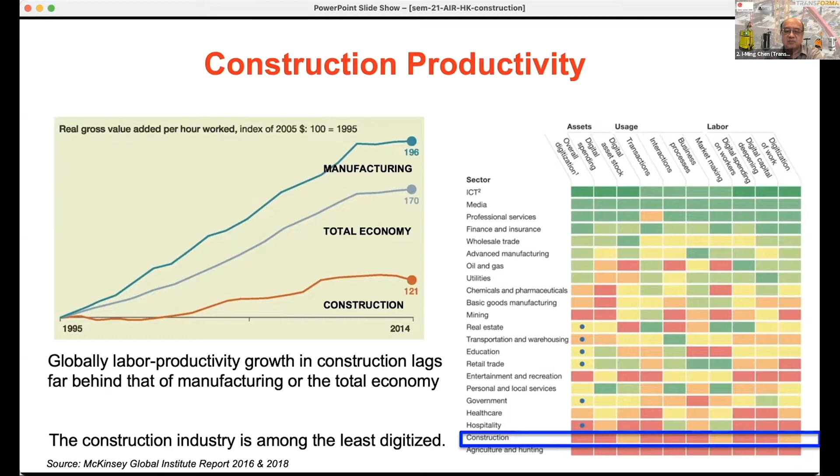The construction productivity, I think, as Oliver just mentioned, is low compared to the total economy globally, and of course much lower than manufacturing. In terms of digitization, this is also low compared to many sectors, and digitization is also one of the indices for productivity.

But we know that construction is a very complex ecosystem. Manufacturing is also complex, but in the construction industry it actually involves, from the very beginning, the architecture, developer, contractors, and even after the building is completed, you have the facility management as well. So now, because of the advancement of robotics, IT, information technology, and AI, we are trying to move up the construction sectors with digitization efforts.

So now, how do we really do that? Because we see, on one hand, there is quite a bit of work done in the sector, but a lot of construction work is related to regulation. So how do we do that? This will show you how we tackle this problem.

So in terms of Singapore, the government actually promotes the use of these systems. On one hand, the government would like to use this so-called TRL, technology readiness level, to look at the system's maturity. They want to use this way to mature some of the lower, newer technologies through public demand, becoming the first technology adopter. So agencies will provide funding to companies responding to their needs, such as our Building and Construction Authority, the National Environment Agency, and so forth.

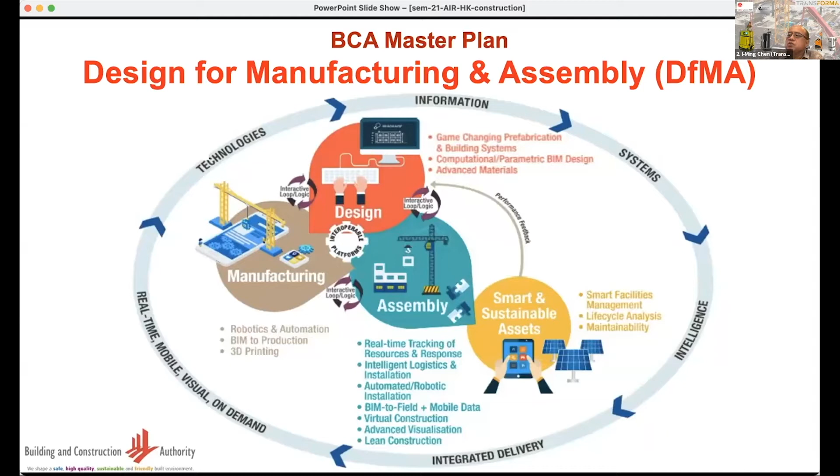So this shows you an idea of what we're talking about. In Singapore, because land is scarce, we show you how Singapore's precast or module factory looks like.

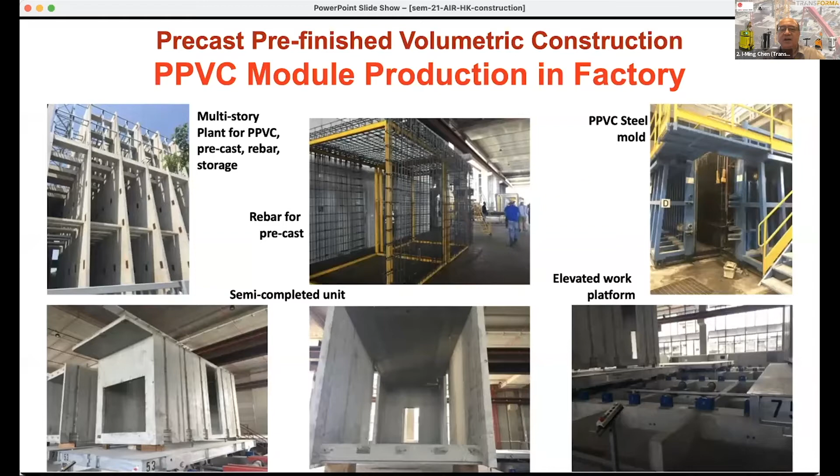So we have the factory, they're all multi-stories, and they put automation and some equipment in there, for many facilities like precast rebar storage at different floors. Unlike those countries that have infinite land, where you can put things in a horizontal plane, here things work differently.

So after all this is done in the factory, those modules will be shipped to the construction site to be installed along with other precast parts. We call this PPVC - precast pre-finished volumetric construction. In short, that's the modules.

So these modules weigh about 30-40 tons. After they're transported from the factory to the site, they will be stacked on top of each other, just like a Lego block. The crane needs to be a high capacity crane for hoisting all this to the designated location.

So after blocks are joined together, there are many common areas to be joined through precast components, and there's also some in-situ fabrication. But through those kinds of modular construction, we can greatly save manpower.

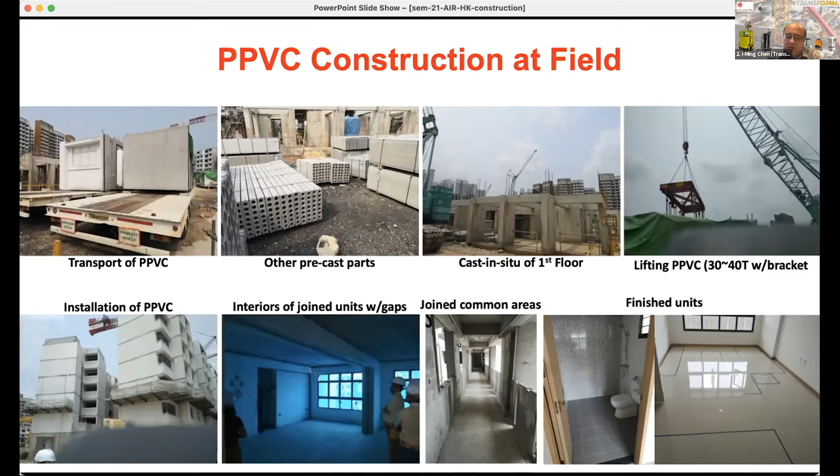And of course, at the end, we still need people going there to do inspection and final finishing. So with this PPVC, I think Singapore can already save about at least 30% to 40% manpower at the installation stage.

But of course, we're not stopping there, because we still have a lot of people doing different bits of work here and there. Therefore, our National Robotic Program Office launched a 3-year program we call Robotics for Construction 4.0 from 2019. I happened to be the program lead.

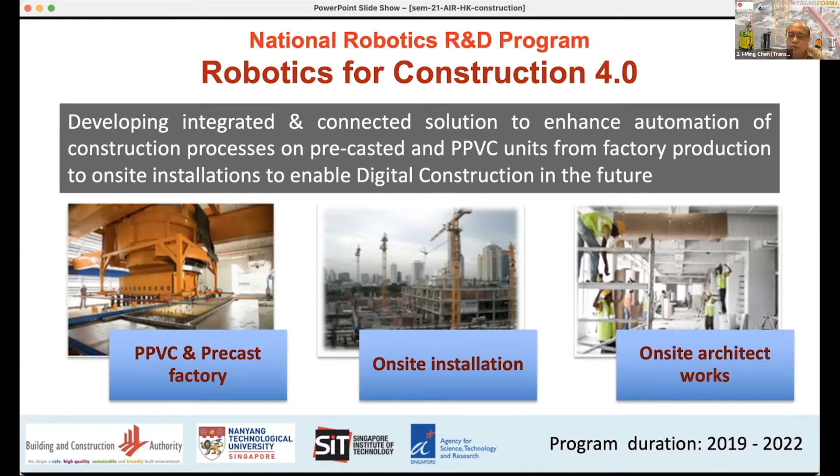The goal is to develop a number of linking technologies for an integrated solution to enhance automation of this process for those precast and PPVC units from factory to sites. The vision is grand, but we can only start small, because there are too many things we have to do - we cannot cope with everything at one time.

So this program, we adopt a whole ecosystem view. This shows you what we have in this program. Under this program, we have 4 major packages. One is the so-called smart cyber physical systems.

That's actually to develop the AI engine for manufacturing of those PPVC units. Even in this plant they have the so-called MES system, but on top of that, this kind of construction factory is very difficult to schedule because of a lot of uncertainties. We also have a robot just using the vision system to do imaging for supervision.

And we have one other robot for on-site work that will be able to bring heavy loads on-site and also overcome obstacles and stairs. Finally, we're working on one project related to cranes, so as to make it smarter and the installation quicker. This is very important because most construction sites now in Singapore use cranes.

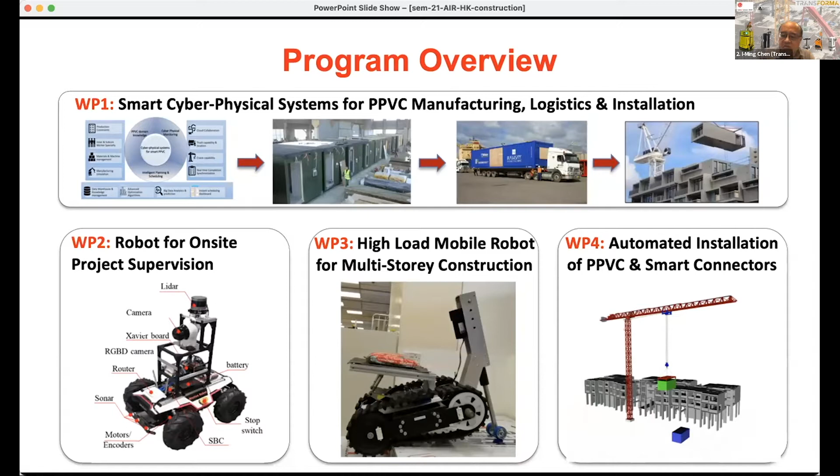So now let's start from the first thing. The important thing of this cyber physical system is the integration of PPVC production, domain knowledge, intelligent planning and scheduling, monitoring, to achieve a fully connected solution from the factory equipment to on-site equipment, with real-time data and real-time decision optimization, as well as manpower development.

So this whole system will be able to integrate input coming from some of this... human. So the system we can allow - it's a cloud-based system - we will be able to allow the workers to input their schedule and also link it with the machine information.

We also need to realize that in the factory, it will be efficient to manufacture all identical modules in batch production. But on-site installation is different because that's vertical installation - we need to build floor by floor, installing different types of modules level by level. So how do we balance the requirements of these two types of work?

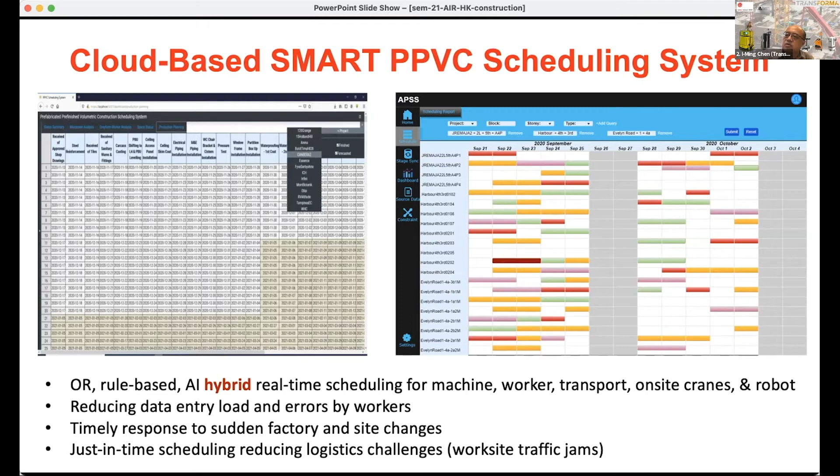Factory produces the same modules, but on-site work requires installing different modules. So how to balance this becomes a very important thing, which has never been thought of before. We know this kind of modular manufacturing will become more and more important, not only in Singapore but also in other places, like Hong Kong, which has large construction projects that need to be done.

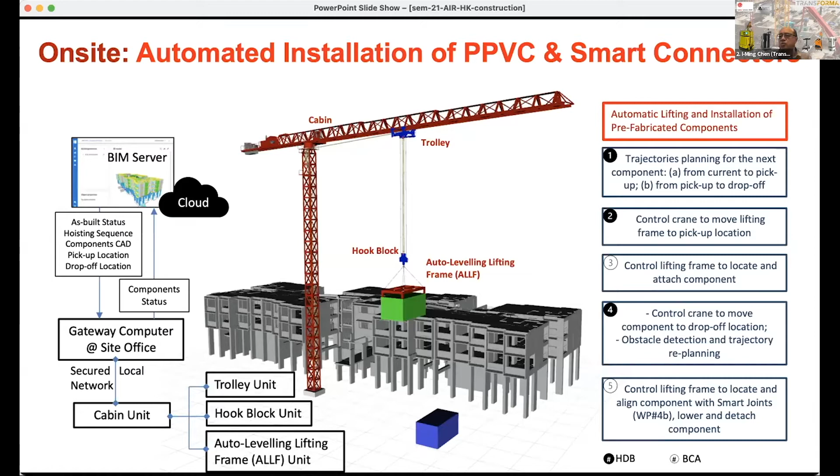Now let's look at the cranes. One of the bottlenecks in on-site assembly of modules is crane lifting and installation efficiency. So we're developing an intelligent control system for the tower crane to act like a robot arm that can automatically move around with trajectory control and BIM information update, using various sensor control modules. They're designed to be fitted into existing cranes.

This project has almost been completed, so we've done quite a few trials. This shows some of the trials we conducted in the training ground of the BCA for evaluation and fine-tuning, from cabin control to trolley control to hook block and wireless control. All these aspects of work require a lot of new ideas and engineering effort.

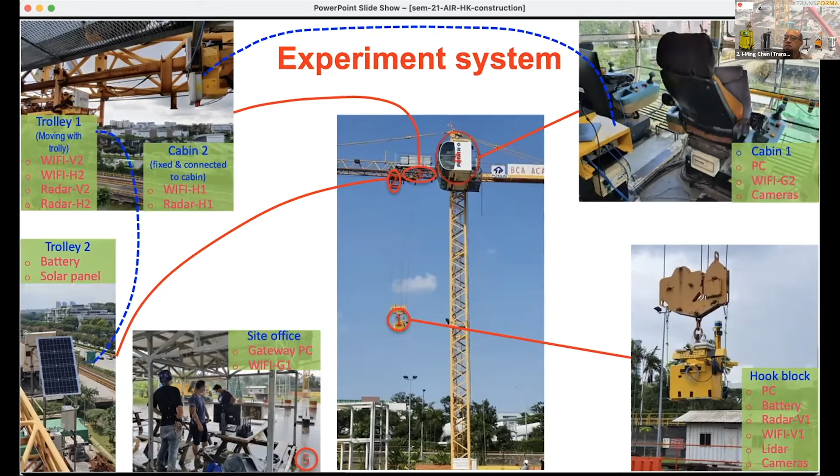Now, the PPVC unit is just like a Lego block, so it has connectors at the four corners linking the modules together. In this project, we also look at the design of the connectors and condition monitoring of the connectors in use. For effective connection in the installation process, we have three types of connectors: wire loop, corrugated pipe, and J-hook, as shown here.

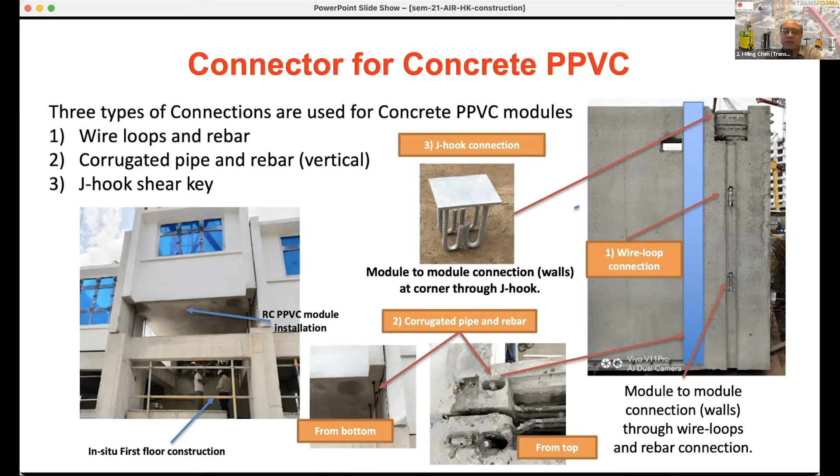Because different modules may have slightly different designs depending on the company, we're trying to look at how we standardize that, as well as how we bring that to what we call monitoring the health of the connection all the time.

Now, we mentioned we have a project on robot supervision of project progress. Currently this is done by a supervisor walking along the sites. The main technology here would be 3D vision for object detection and recognition, put onto a mobile robot. We also have BIM information fusion for filtering the navigation.

The wheel robot is the most useful platform we use for the operation. Having said that, we can of course put this onto drones or legged platforms, but that depends on accuracy. We estimate this covers about 80% of the jobs, and we're also looking at what other possibilities exist.

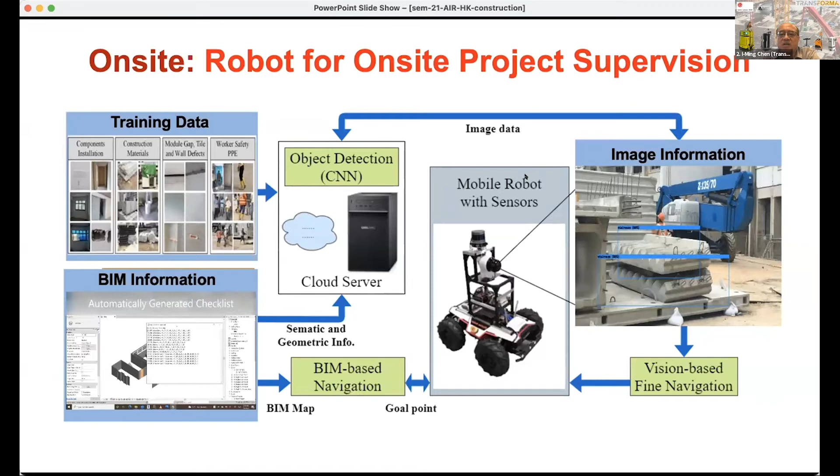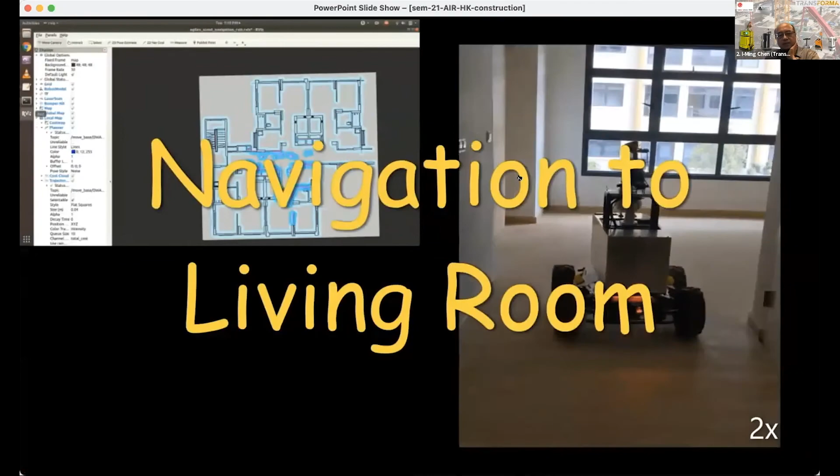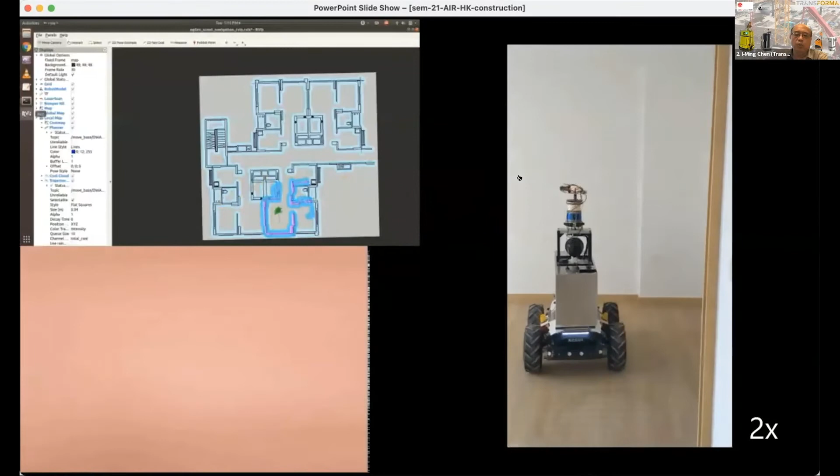Let me show you a video of these trials. What we can do here is bring in BIM information, and then use the BIM maps as a guide to do the navigation, because robots have what's called SLAM, simultaneous localization and mapping. With the BIM information, we can greatly save the effort of doing the navigation, and also do some planning before we start.

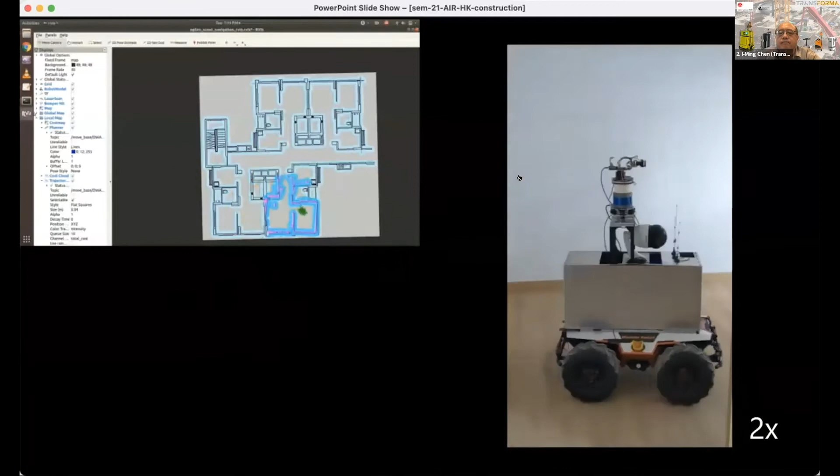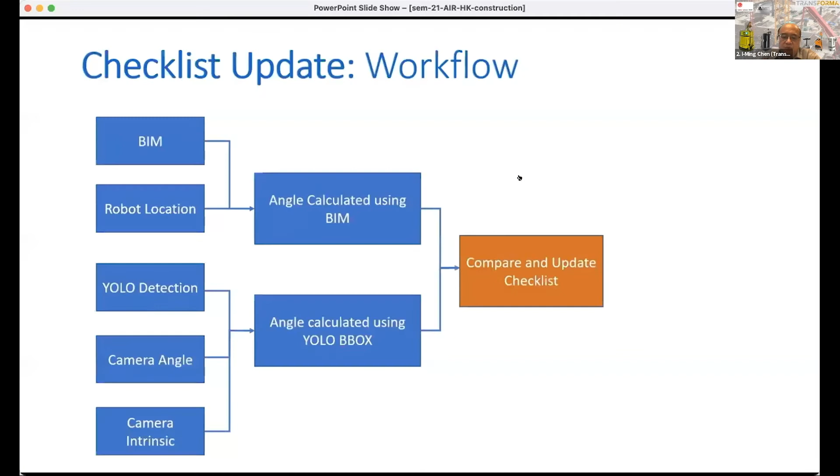This shows how we look at this as a near-completed unit, but we could also do this before the staging. Finally, after they check, they will update this. So this could become a fully automated process.

We also mentioned we have another on-site robot for bringing heavy loads across multiple types of terrain, including staircase climbing. Why do we do staircase climbing? Because right now the work site has a very limited workforce, so contractors would like to deploy human workers for more skillful work, such as surface preparation and installation, rather than just finishing work. So these tasks can be replaced by robotic means.

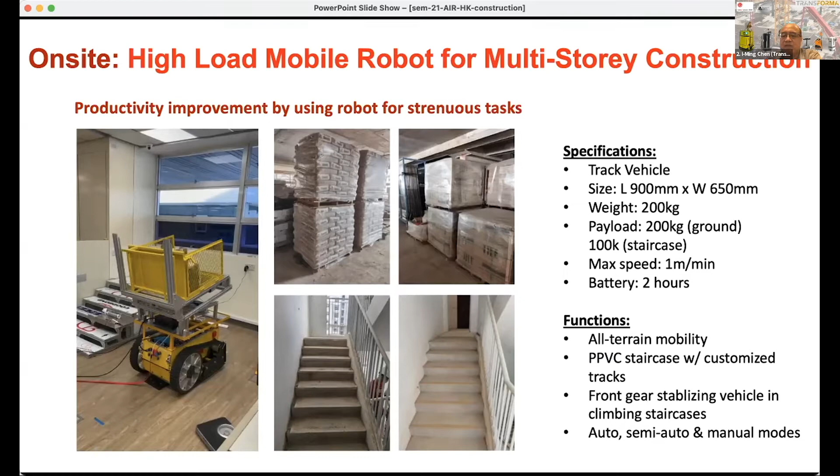Therefore, because we need to cope with different types of terrain, we're looking more into a track vehicle design. This is how we perform the field trial. You can see how these machines work, designed with a multiple payload design.

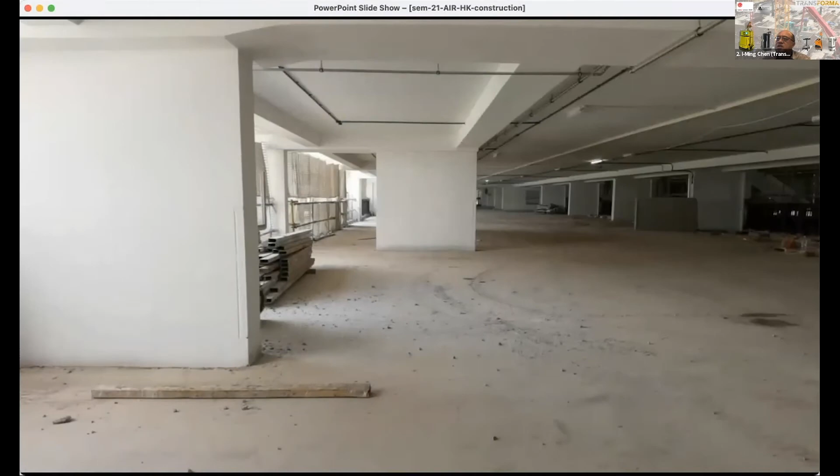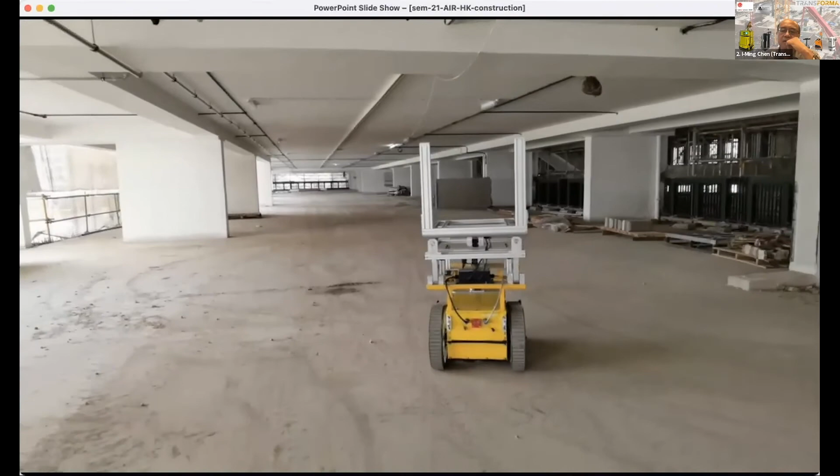So you can carry goods. This version can carry about 200 kg of load in one go. We have different versions; the bigger one can carry up to about half a ton. On top, we can design it with just a bin or with a small forklift that can automatically load and unload different materials.

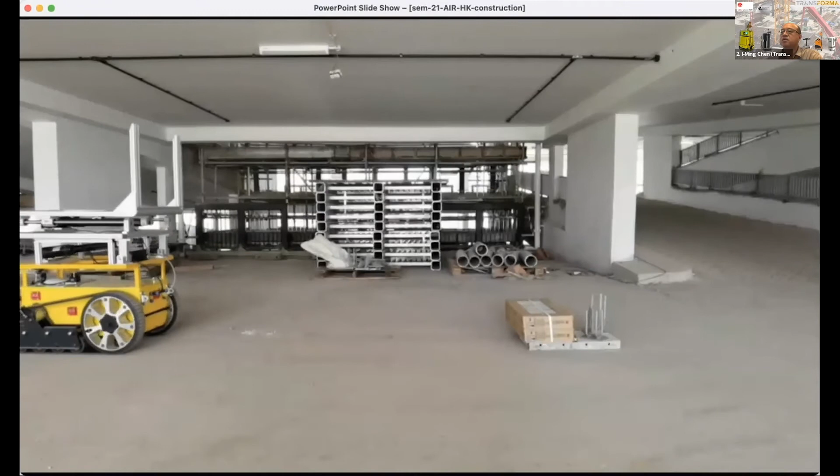And we're also considering putting the manipulator arm on top of that to do some drilling work and so forth. So this is versatile, but of course in actual use we may not do all of that. That really depends on your site, the type of site and condition, and the robot will be done autonomously or semi-autonomously, or simply just using the joystick to control.

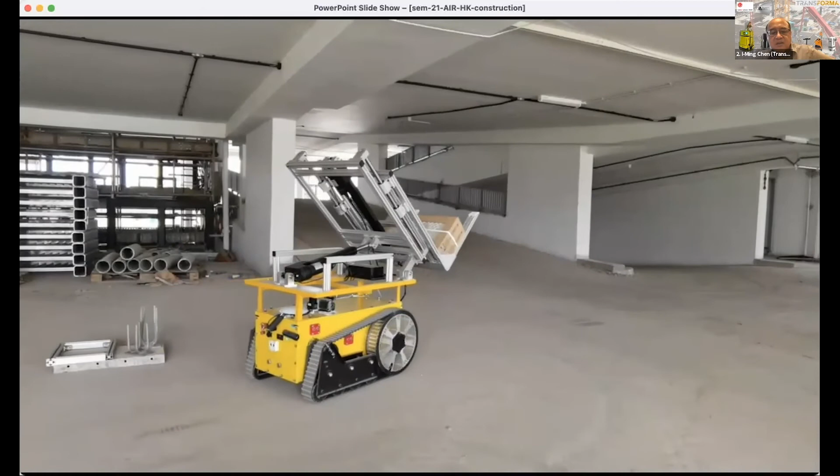So human operation is one thing, but after we discussed a lot of feedback, I think they like it more in the follow-me mode. Considering the complexity of the sites, if you do autonomous navigation, we may still need to give them some pre-designated route to go. But if you have a human worker just go in first, then this robot can follow - that also can work. So this is really how we look at the navigation capability, and the mode becomes quite important.

So this shows you how it works. So this we can bring back.

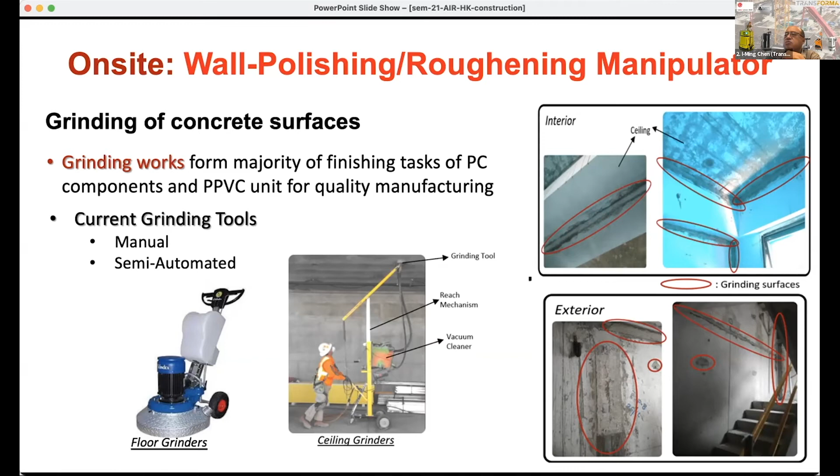In addition to the 2 robots, we do supervision or lifting heavy goods. We also identified the manipulator to perform concrete surface polishing and roughening, which is important for PPVC, because after installation some part of the PPVC surface still needs to be polished, and the gap needs to be filled with grouting. But now all this is done manually by workers, and it's strenuous and unhealthy for them. So this work has now been tested at SIT, Singapore Institute of Technology, and there are several contractors now doing field tests.

So this system now adopts a cable-driven system with frame support. The normal force required by grinding or roughening can be achieved through this configuration with a carefully designed layout, but the normal force is not as large as those for metal grinding. We adopted this kind of design because it allows us to do fast installation with covered surface area of arbitrary size.

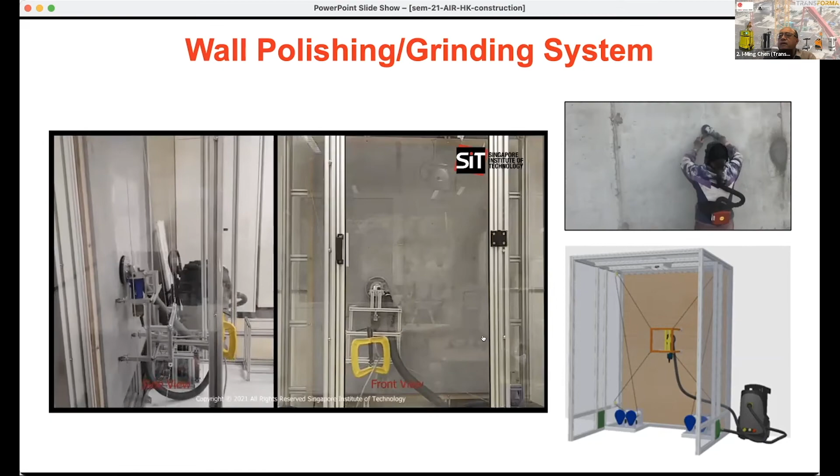So this is some preliminary result of this grinding, which is much smoother than the manual work. The researcher had some prior experience dealing with aircraft grinding, so changing this to a cement surface was also quite straightforward.

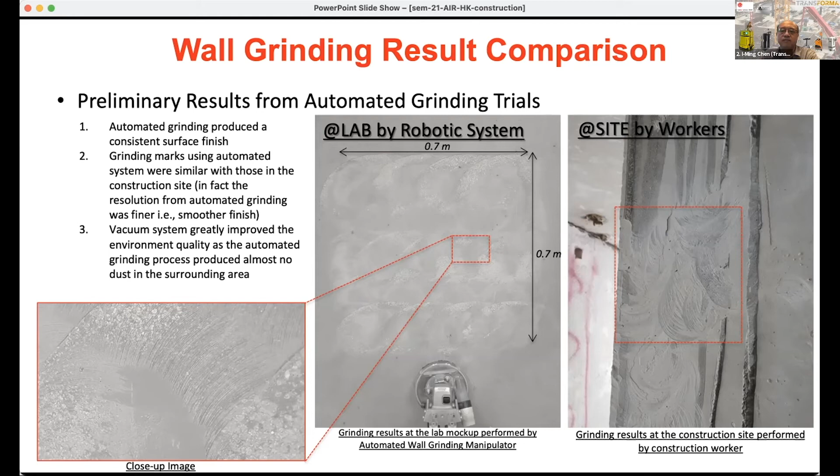Now as I mentioned, this is a government-led project, and we have universities and research institutes performing the R&D work, and we are testing along with several industry partners, from contractors to end users, and even some equipment owners. But for others, there are some government-led demand projects at a more mature stage, where the government will help us move in to test and speed up the commercializing effort, because construction sites in Singapore are normally limited in quantity.

So these are some work done by our Transforma Robotics, which is one of the construction or built environment robotic companies in Singapore. Transforma Robotics was spun off from NTU since 2017.

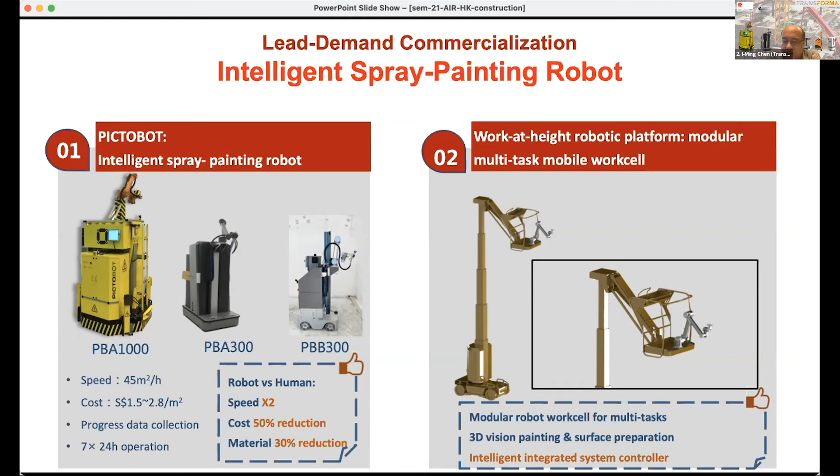So under those projects we worked on with JTC and some BCA, over the past few years we've been working on robotic painting and coating for buildings and other infrastructure as well. We reckon construction scenarios are not standard, hence we developed a number of platforms to adapt to different construction environments, from residential, commercial to industrial estates. We also use the same automatic control to extend the robot functionality beyond spray painting to other tasks. So here we show you one of our commercial painting robots that can paint up to 3-meter range.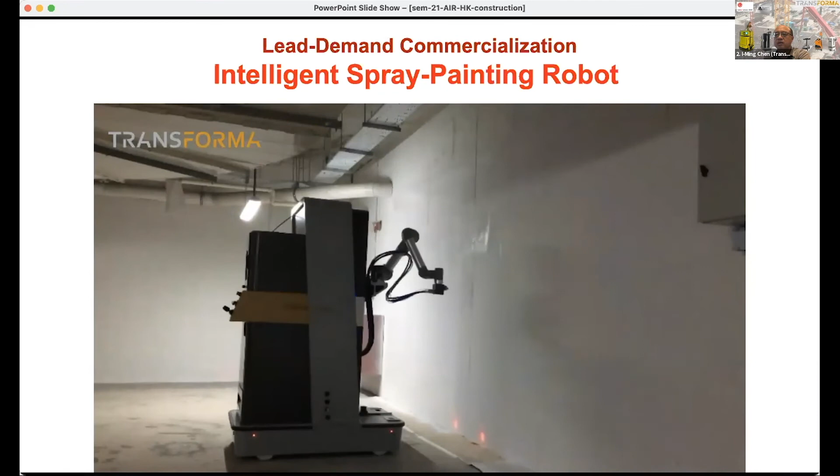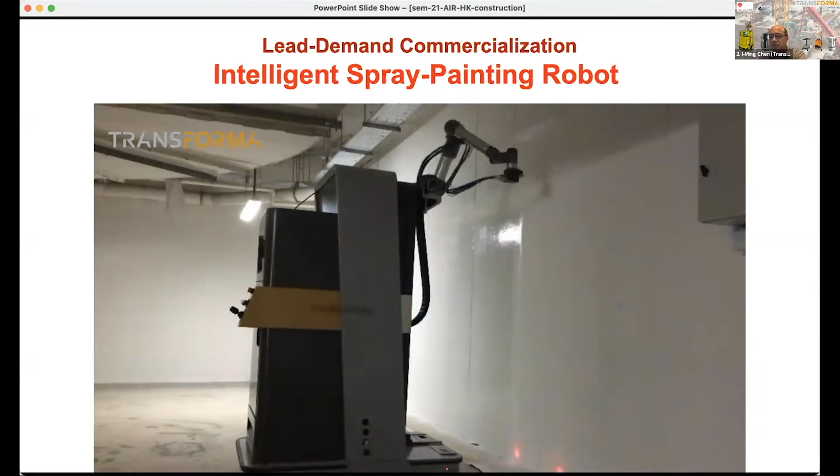This is for car park painting, for new or renovation work without much human intervention. So in this way we can save manpower. Of course we cannot say we can completely remove the manpower, but humans just need to go in at the beginning to do some preparation work, masking out areas, and then after that the robot takes over, and the human needs to do some wrap-up work. So I should say humans still need to do probably about 10 to 20% of the work, and the majority of the process will be done by the robot automatically.

So the robot also scans, because we use the scan, so the robot will be able to recognize if you have a window or door, to avoid that.

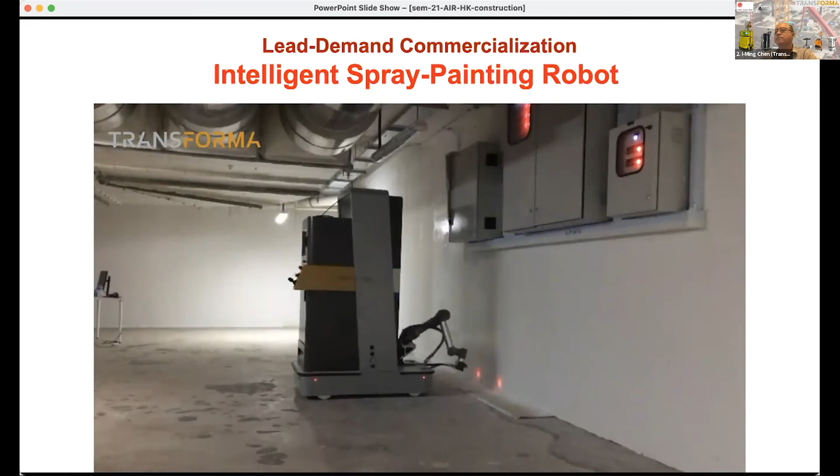Of course, the application scenario includes on-site and off-site work, so we have done these in different locations. Protective coating is another area we're working on, because these areas require very precise coating and are very hazardous and unhealthy environments—the kind most people want to replace with equipment or robots.

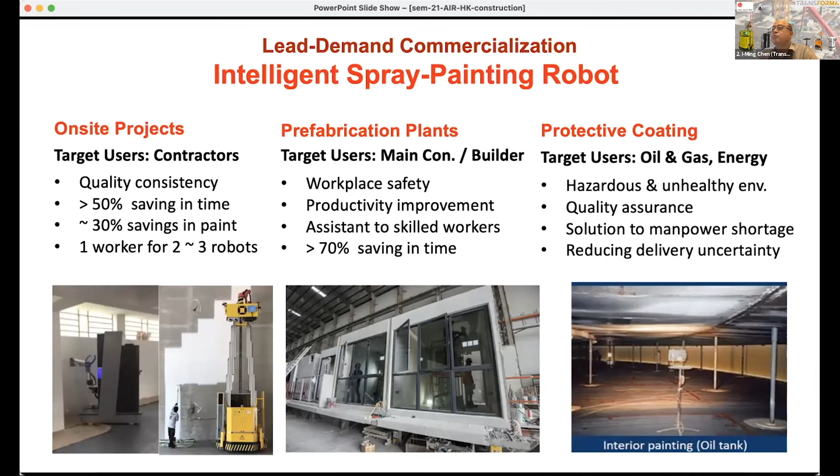We also further refined some of our robots. In the early stage we built a robot we call QuicaBot, for building quality inspection during the handover process between contractor, developer, and house buyers. Automatic inspection tagging with AI imaging can be done here.

The main proposition is that we can do document and data automation, as well as give an objective inspection result. On the right, we also developed a robot just for floor and tile hollowness checks. The robot scans and maps the room, covers all of the ground, and generates a hollowness report so the contractor can decide whether to repair or not. These tools help these different parties a lot.

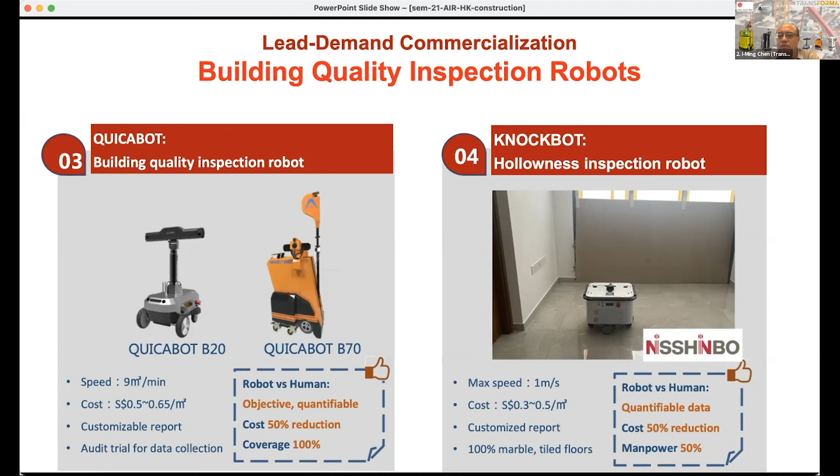If you look at hollowness checks, right now we're using a rod to do the work, but now we're using a robot—so this improvement is becoming tremendous. Here are some videos showing the robots.

On the left, that's the QuicaBot. It uses 3D scan and imaging technology, because we have dimensional defects as well as surface defects, and we can collect the raw data. With the raw data, we need to do an assessment, since all of this follows certain quality standards.

We built this according to the BCA's CONQUAS standard.

On the right, this gives you the KnockBot. We tested this one in a number of residential projects so far—it's still a prototype, and we plan to shrink it down. It uses acoustic signals and gives full coverage to look at the whole place. It's a small but interesting project, essentially a mobile robot with a payload.

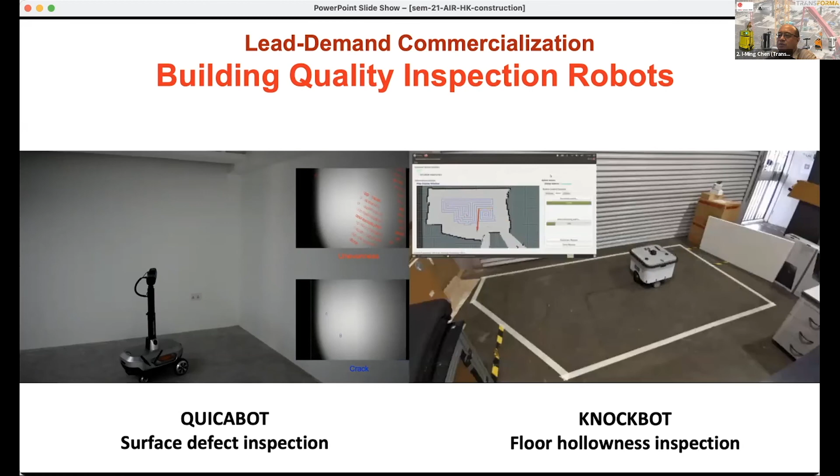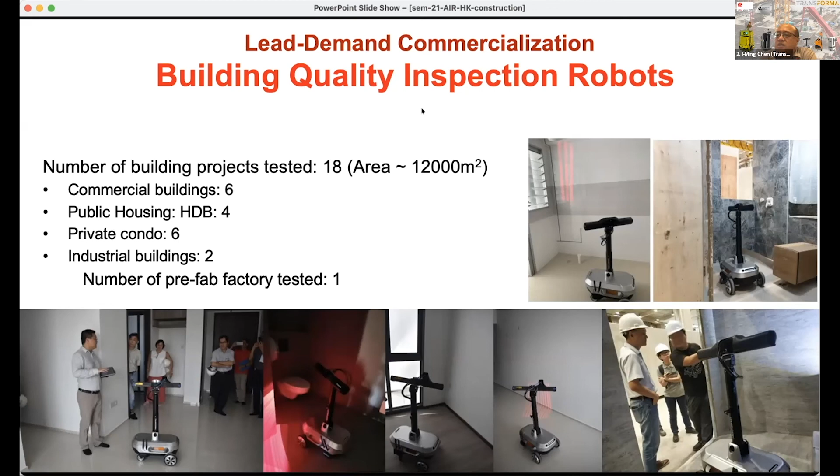So far we have quite a number of projects done in residential, commercial buildings, and industry. We're in discussion for further use of this.

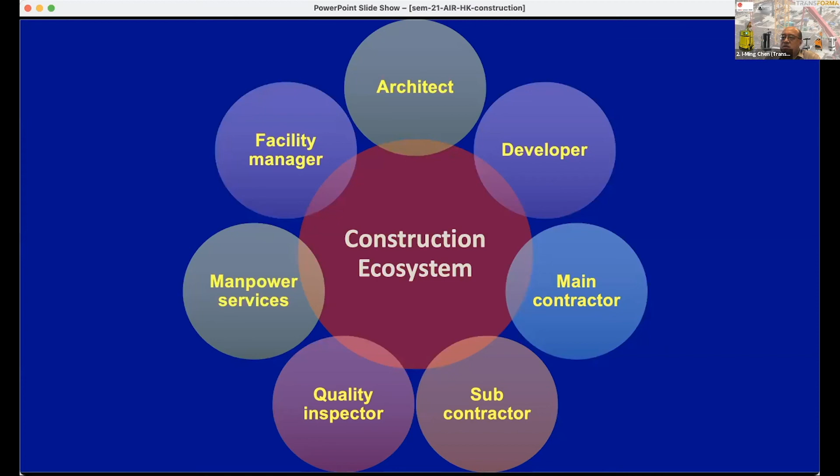I'd like to use this picture to summarize. As I showed before, the construction ecosystem is very complex and large. AI robotics can be used in any aspect of this ecosystem. However, to facilitate adoption, government push and traction play a critical role for this deep tech company to continuously improve its products, because they're a new breed—we need to go through iteration after iteration. It's not something you can get overnight.

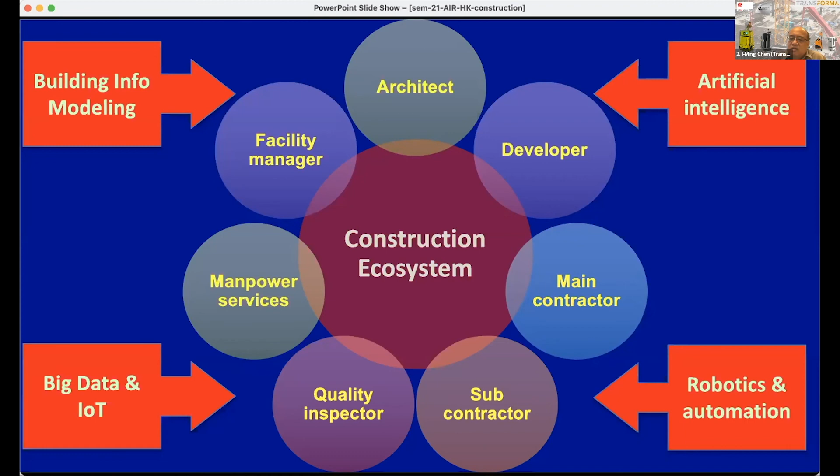The COVID-19 situation already sped up that adoption—especially, we no longer need a lot of effort to educate the client, as they now really know these robots are quite useful. So we'll see more fruitful adoption and collaboration among researchers, government, and industries, because a lot of things are new—there's no way you can do this single-handedly.

With this, I'll end my talk here. I'd like to acknowledge all the people from faculty members, research staff, students, as well as our funding agencies and collaborating partners. Thank you very much.